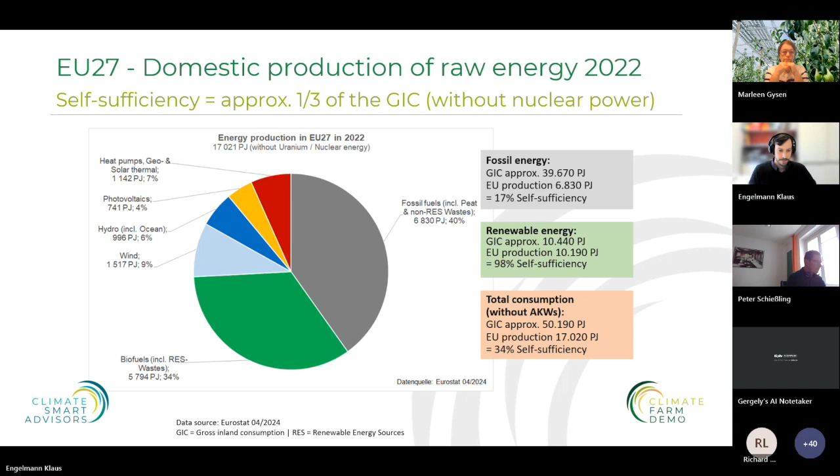So we might also get a bit of a feeling of where the big points are to tackle. We talk a lot, in my opinion, about electricity, and electricity is getting bigger because many processes are getting electrified. However, to really reduce emissions quickly, the heating sector is also one we should tackle quite fast. Just so you know, the numbers are from 2022, not the 2024 ones.

So in 2024 we already have a bigger number of renewables, but in general it's shifting a bit — not a big shift, there are not big differences.

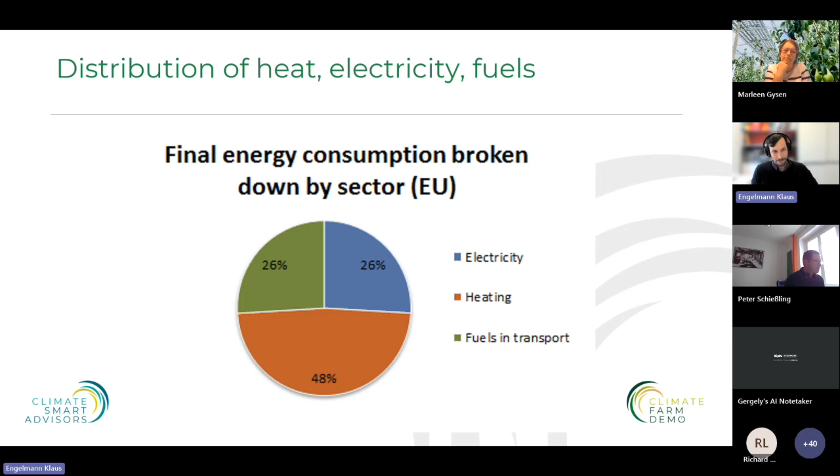So this is for the first introduction, a general introduction, and now we really go more on a farm level on this today's webinar. Maybe Marleen, you give a short recap. I will take over for the next 2 slides.

First of all, know your farm. How much energy is needed? When is this energy needed? And especially, which is becoming more and more important, at what power level?

Second step, how to optimize your energy bill. You need to have a clear insight into the different costs of the bill. And then the next step is about energy efficiency.

So which energy saving measures can you apply to your farm based on the measurements at your farm? Which renewable energy technologies suit your farm? So really tailor-made, the approach is really tailor-made to what is suitable for your farm.

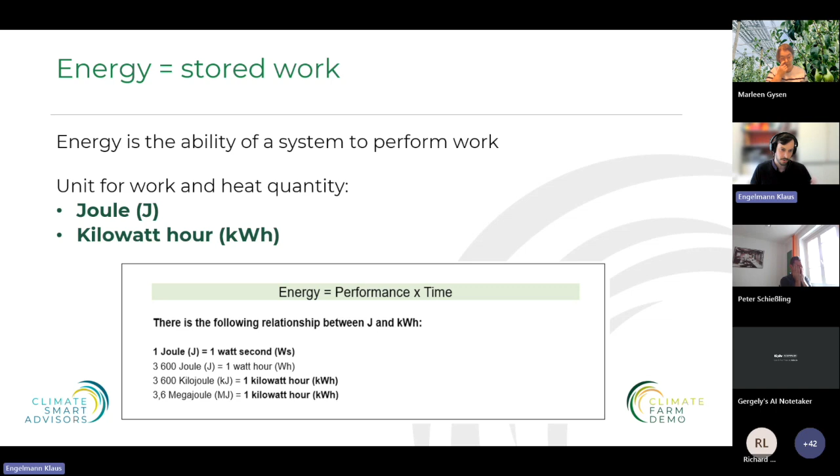Just for an introduction, so what's also important is to know how many joules are in a kilowatt hour. We have the factor 3600, so 3600 kilojoules equals 1 kilowatt hour. So those are the most common units we have for energy, and I'm sure you're familiar with these growing energy units like kilo, mega, giga, tera. You know it from IT, and we also have it here in energy. So kilo means 1,000, mega 1 million, giga 1 billion, and so on and so forth.

So let's go there - what can you do with 1 kilowatt hour? That's maybe the more important question. A kilowatt hour is stored energy, stored work. The question is which work can I do with a kilowatt hour? In a private household, I can cook a meal for 4 people with an electric oven using 1 kilowatt hour. In an agricultural context, I can grind feed for 12 minutes or mix slurry for 4 minutes, or operate fans and so on.

That's really important, to really know what a kilowatt hour can do. Beside joule and kilowatt hour, we also have some historical units, especially in some reports we still read a ton of oil equivalent. Those units are mainly from the fossil era - ton of coal equivalent, the barrel, the ton of oil equivalent.

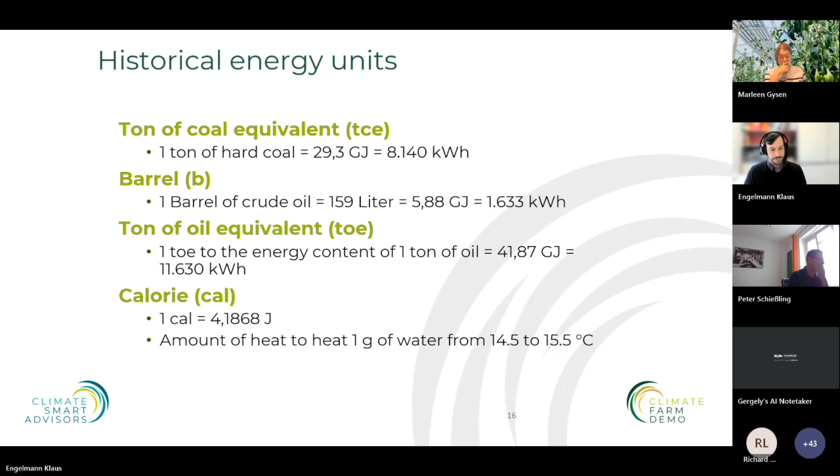And we can recalculate the calorie, of course, to kilowatt hours. So 1 megacalorie in this case would mean I can heat up 1000 liters of water by 1 degree Celsius, or it's also the same energy as 1.163 kilowatt hours.

Where is this important? For example, if I have a photovoltaic system, it might not seem important at first. However, if I have surplus energy from a photovoltaic system and I don't get a good price for inserting it into the grid, or maybe I'm not allowed to insert it because I have a power limitation, I can go into power-to-heat.

So I use my surplus PV power and heat up my water boiler for agriculture. For example, if I have a 1000-liter boiler where my usable temperature range is like 30 degrees - say I use the temperature area between 50 and 80 degrees Celsius - that's 30 degrees times 1.16, so I can store approximately 35 kilowatt hours of my electricity produced from my PV system in this water boiler. That's important information if I'm using every bit of my energy system.

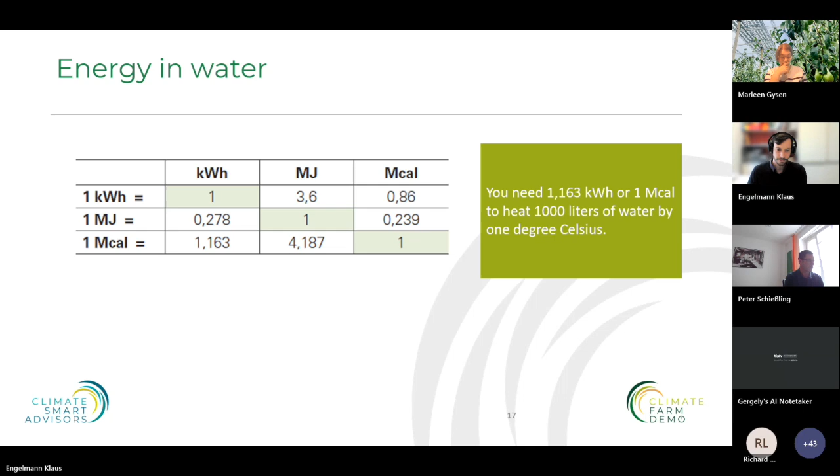On the other side to energy, we have the power, or the performance. The power is really the work converted per unit of time - it's work divided by time, the speed at which we do the work. Power is just kilowatt or megawatt or watt - not a megawatt hour, just the megawatt. So we can measure power at every moment in each period we do some work, but we can't measure the energy in every time period - we can only measure the energy over a time frame, for an hour, for a second. That's a really big difference.

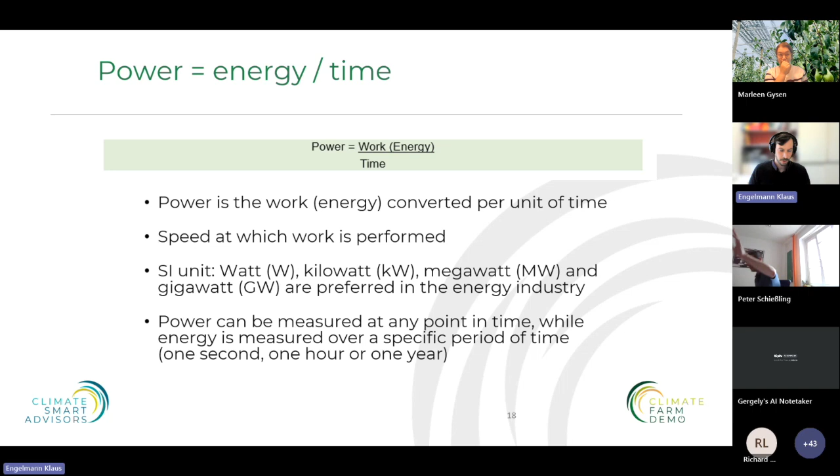In the practical advisory work I'm doing, I'm really often hearing that energy and power get mixed up - maybe not in what the people mean, but in how they say it. So I often hear things like 'my PV plant produces 10,000 kilowatts' - they just skip the hour. They say my PV has 10 kilowatt power and they produce 10,000 kilowatt energy. We really should distinguish between those and use the right terminology.

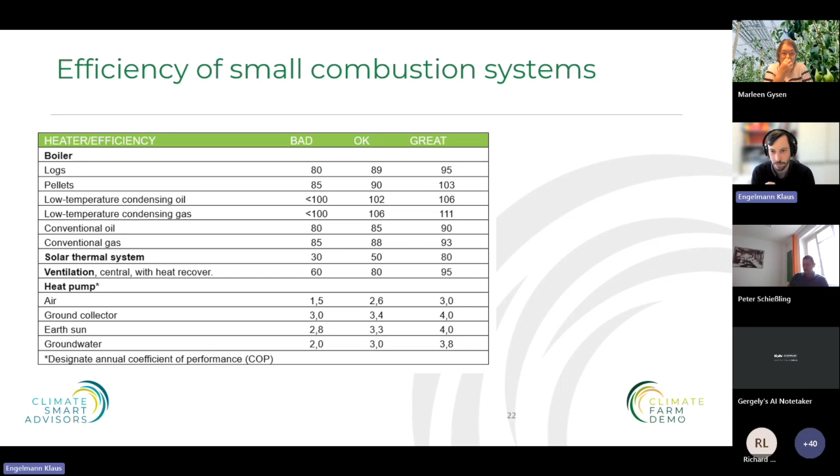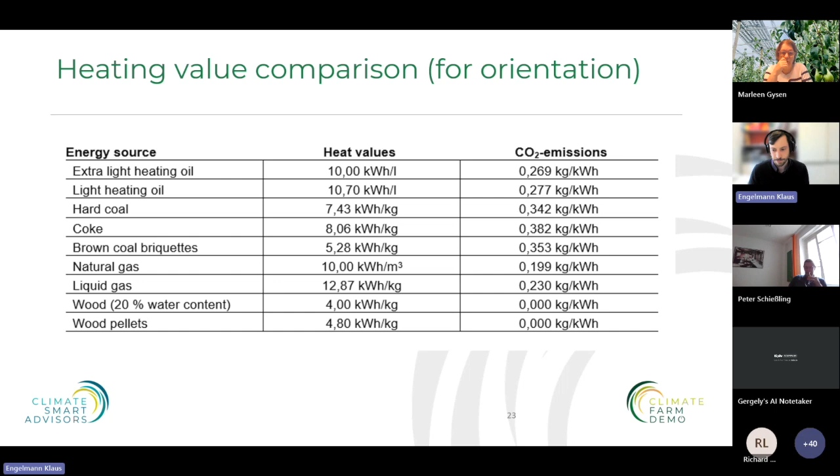So yeah, that was it for the first introduction. Then I will go to energy accounting.

If we know what energy is and what the heating value is, in our daily advisory work, and I already showed this slide in the last webinar, we have those 4 areas in the middle where we can go into: energy efficiency, energy generation, energy storage, and energy management, always with the goals to lower costs, reduce dependencies, increase self-sufficiency, and reduce consumption on the farm level.

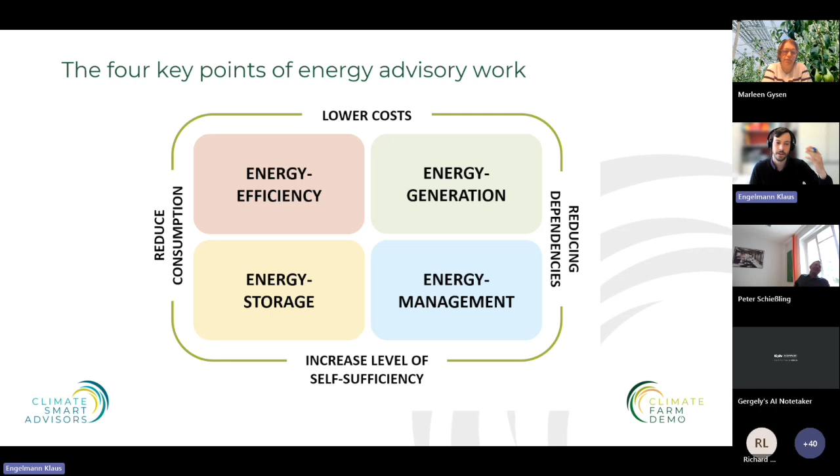However, to do this, I have plenty of options on a farm, as you can see in this picture, where I can go in and optimize my energy system. But to do this, the first step is to know the farm and to know the energy. And that might sound simple, but in our practical work, it isn't.

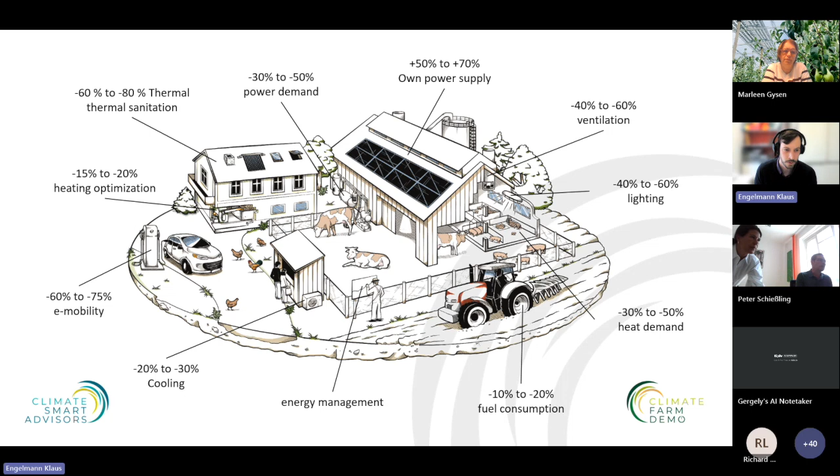We have some prerequisites for energy advisory work on our farms. We should know the energy demand. We should understand the farm, which agricultural sector it is. For example, if I have a stable with fans, I can say from an energy perspective, okay, shut down the fans and you have less energy consumption, but that's maybe not so good for the animals in the stable.

So I also have to understand the agricultural system and the operational processes in agriculture. And ideally I also have some energy profiles on a daily, yearly basis which you can work on. Marleen will later show you some profiles in detail.

Going directly onto a farm, we have different levels to make such an energy accounting. In Austria we have quite a lot of small-scale farms, really some part-time farmers who have a normal job on the other side, up to bigger farms, and the differences in knowledge about energy are huge. On a lot of farms we really start with the basics.

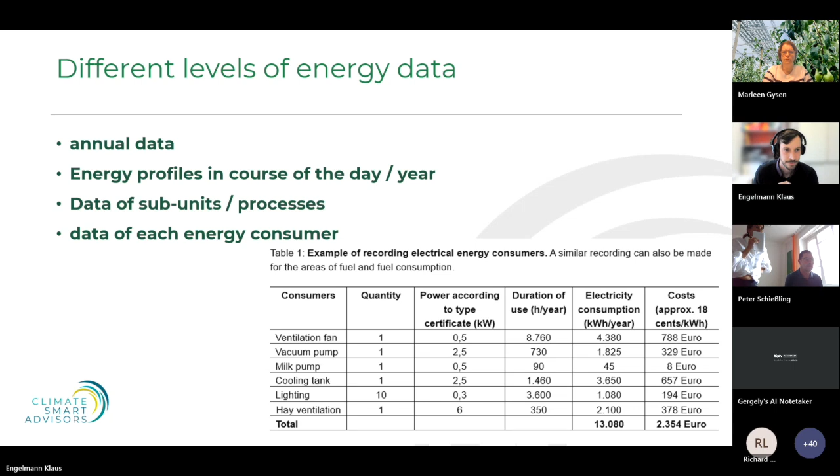Farmers can also do it like in the fuel sector, by making a fuel diary, writing down for each working step what is done, how many hectares, how many liters were needed for this process. So we can work on that in the fuel sector too.

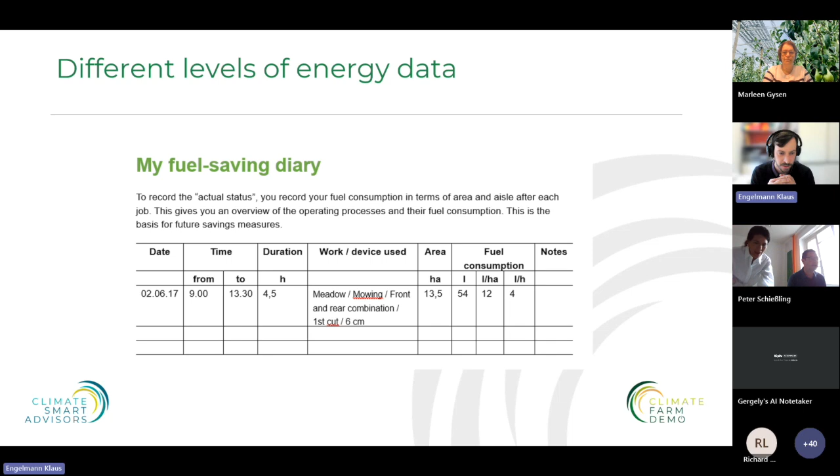So now I have prepared one short video, and I'm not sure if you can start it, Marleen. No, you can do it yourself now. Yeah, okay, then I'll share my screen. It's a German video, but it has English subtitles. Just the very first subtitle is wrong — it's a dairy farm, not a waste disposal farm, so it's a dairy farm. Let's show it. Do you hear the sound as well? No, well, I have to share the sound. Now it should work. Yes.

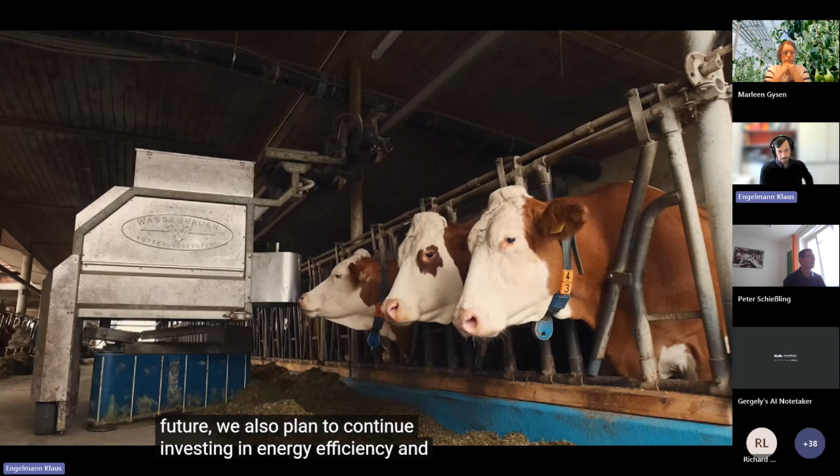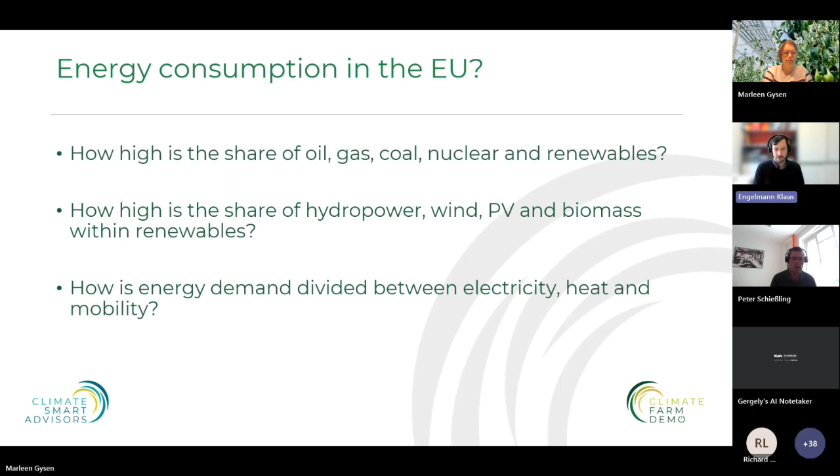So, yeah, it was a short example of one of our farmers here in this region. He really does a lot in the field of energy efficiency, and I think it shows that measuring the energy demand is really important to optimize the structure in agriculture.

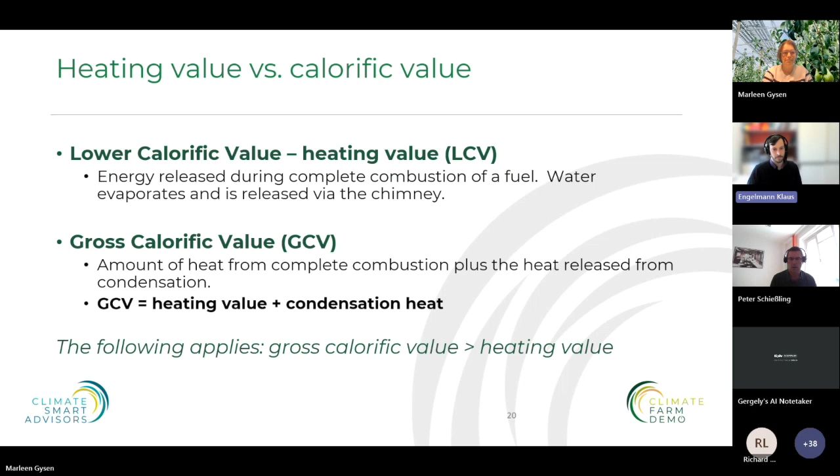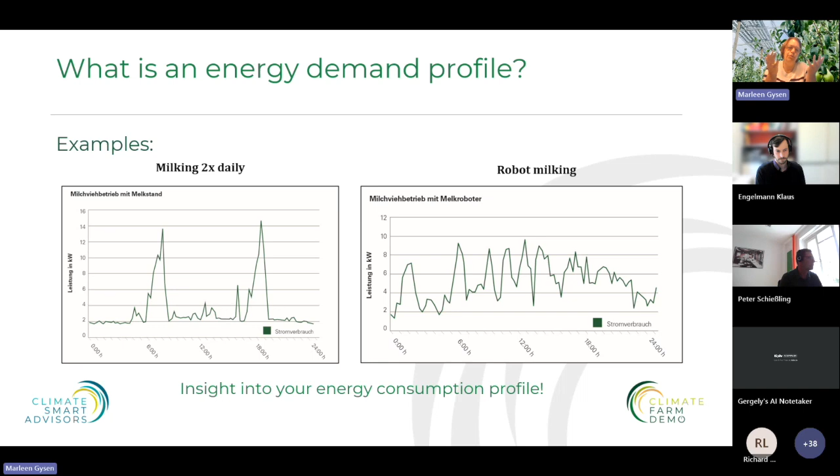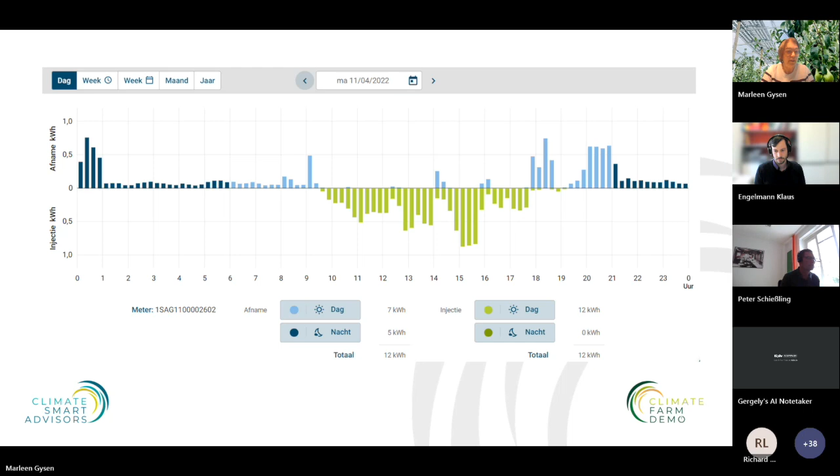When is the energy used, and at what level is this energy used? Another example, this one from a colleague on the Boerenbond projects, is from a household - what comes out of the digital meter, what is recorded. You can see not only the consumption but also the injection. This colleague has solar panels, and during a sunny day he produces more energy than they consume at home. The green one going to the bottom is the injection into the grid. This was from one day.

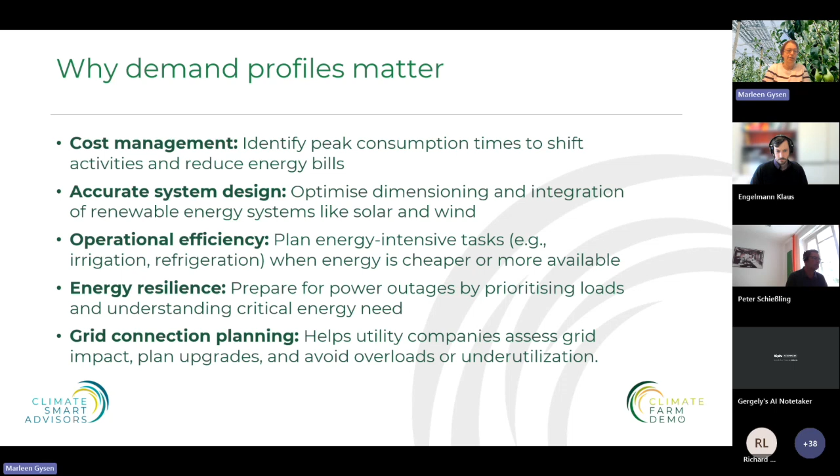It's also useful for operational efficiency - you can plan energy-intensive tasks when energy is cheaper or more available. It's a bit like cost management, but also for energy resilience, you can be prepared for power outages if you have a clear view of your specific farm's energy profile. That's not for the farmer themselves though, it's more on a higher level, for grid connection planning, which helps utility companies.

For example, what we often saw in dairy farms in Flanders, before they had solar power, there was a time electricity was quite cheap during the night. So what did dairy farmers do? They heated their sanitary warm water by electricity, and they did it during the night - they shifted it. Now it's a different story when they have solar power, since the peak production is during the day.

Another thing you can do is peak shaving - you can reduce peak demand charges. It's also an option, but again you need these energy demand profiles to have an idea of the energy demand on your farm, and to improve operational planning.

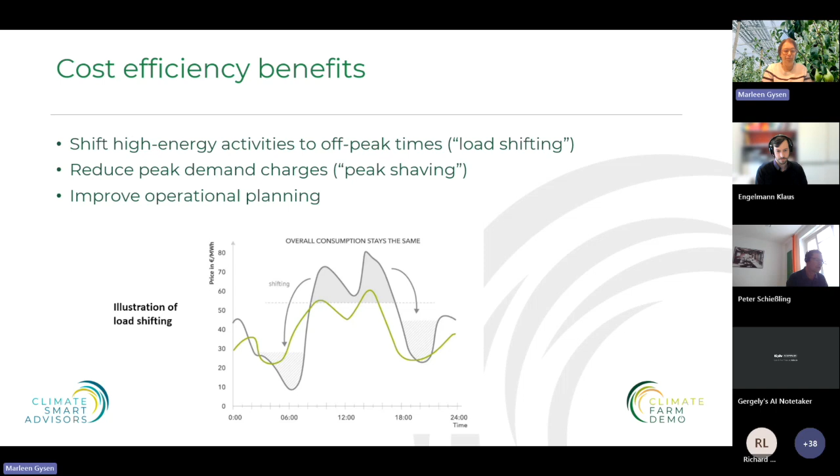For renewable energy, knowing the farm's energy demand profile really helps you in appropriately sizing these renewable energy systems, like solar PV or wind, but also backup generators and batteries.

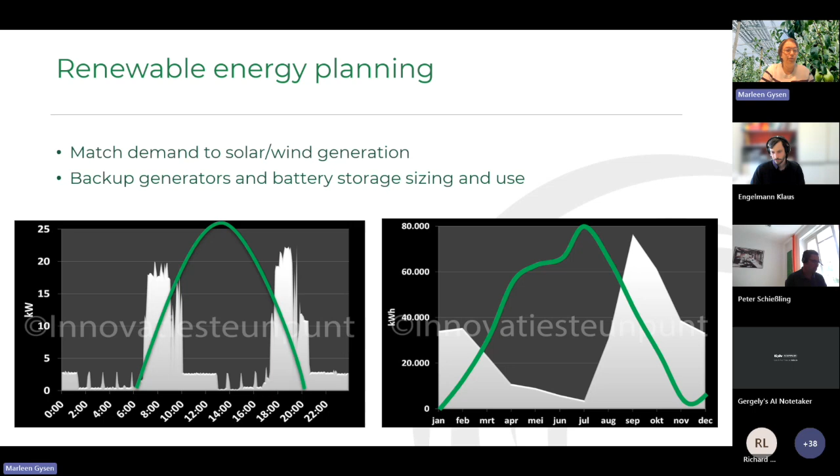The second example is the fruit sector. It's not a daily energy demand profile, but a yearly one. As I already explained in the previous slide, at the end of August, fruit is preserved in cooling cells. The compressors of these cooling cells consume a lot of electricity in the first months, but those aren't the months when the production of the PV panels is highest. So again, this doesn't match on a yearly basis, but it gives us a lot of insight and ways to support other measures.

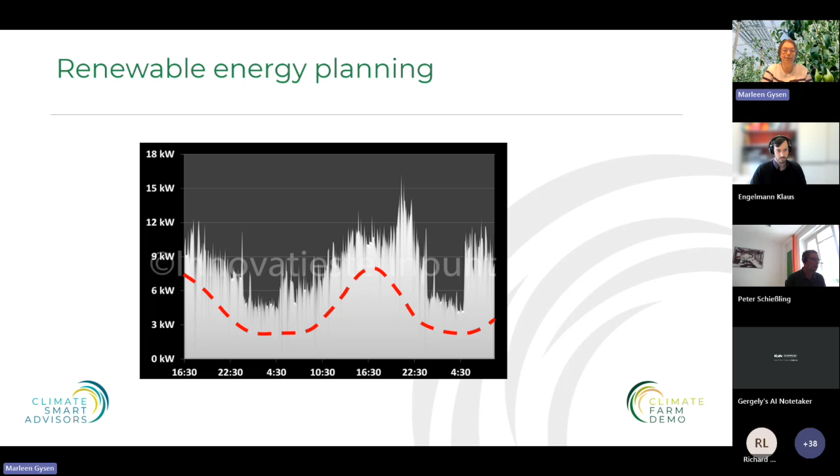But not all agricultural sectors have a bad match for solar systems. This is the example of a poultry farm. They actually have a good profile for solar systems because the main consumer is ventilation, as I explained. When the sun is really shining, the temperatures are high, and animals need higher ventilation. So when the production rises, the consumption will rise too. There's a good match.

There are some challenges, and Klaus already explained this well. Data collection really is a challenge, in particular for specific processes. In the worst case, you go to a farm and the farmer says, okay, I need to pay that amount of euros, or my bill is that amount of kilowatt hours a year, and that's not so easy. It's just an accumulation of their energy amount in a year, so you don't have a detailed profile. That's why we often use typical profiles when we have no detailed data. I showed you some typical profiles already, and especially the ones of dairy farms can be very useful, because they all operate more or less in the same way. So if they don't have detailed information, we use typical profiles to have at least some insight, or at least some base for calculations.

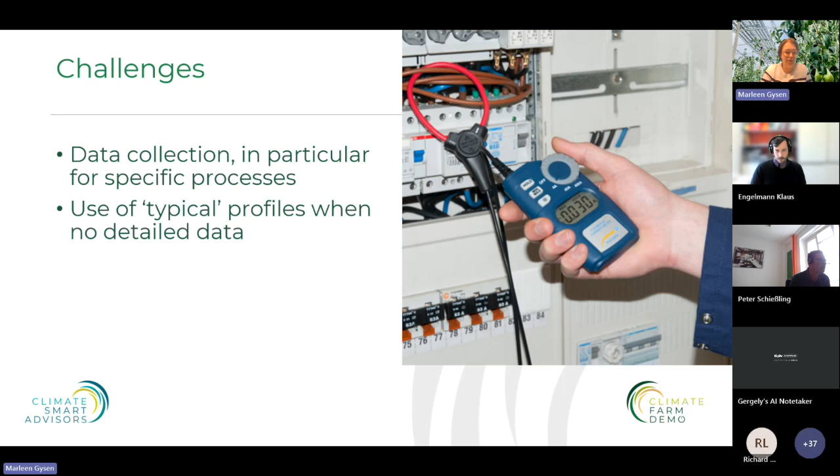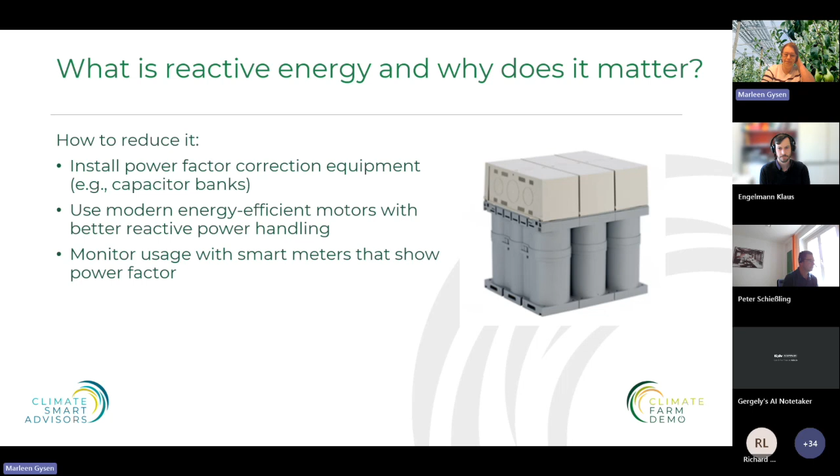I will conclude with the last hot topic. We had, I think in many areas in Europe, very sunny but also windy days, and we also had some holidays over the last weeks. So at least in Belgium, there were a lot of news articles about negative energy prices. What are negative energy prices?

And in these moments, consumers, if they have the proper tariff, can be paid to take electricity off the grid. It all has to do with balancing the system.